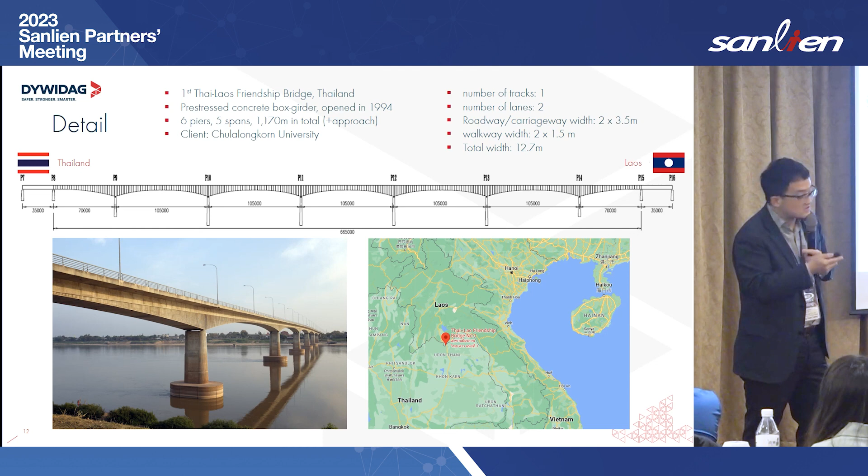In this project, we cooperate with Chulalongkorn University in Thailand. These are the details—I'll leave it to you.

These are our project sensor outline. We installed 19 strain gauges, accelerometers, temperature sensors, deflection and settlement gauges, displacement gauges and inclinometers, and CCTVs on that.

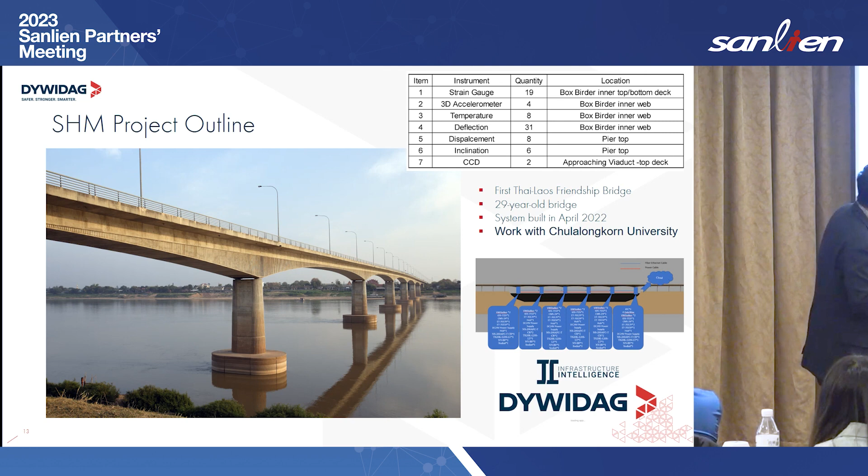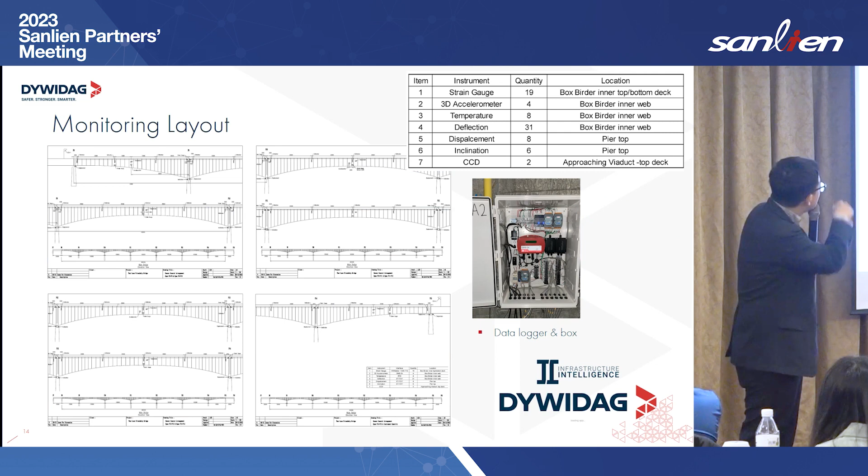These are the drawings and the actual data logger box on site. This is actually from Sanlien—they built this system for us.

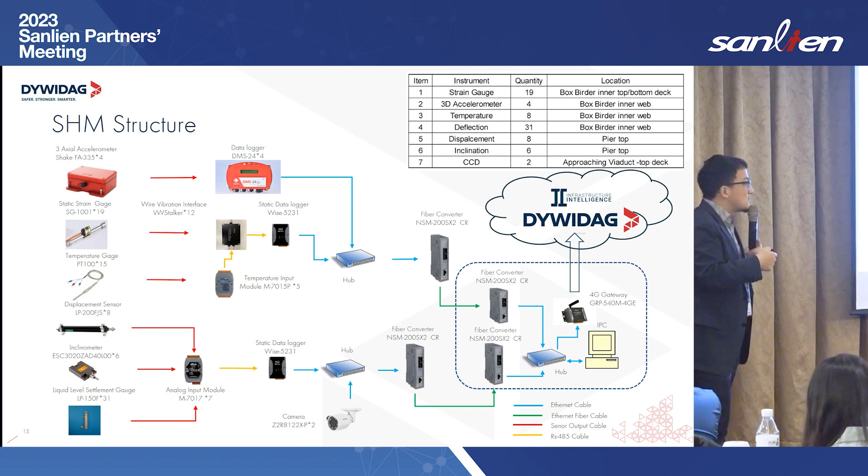This is our SHM structure, from sensors, data loggers, and some hubs, and they will process the data and send it to our II cloud platform.

When it comes to our II platform, I will introduce this. We can have access to this system with any computer, iPhone, or iPad—anything connected to the internet. This is actually the interface of the first Thai-Lao Friendship Bridge. You can see the sensor map here, and all the pages and these icons.

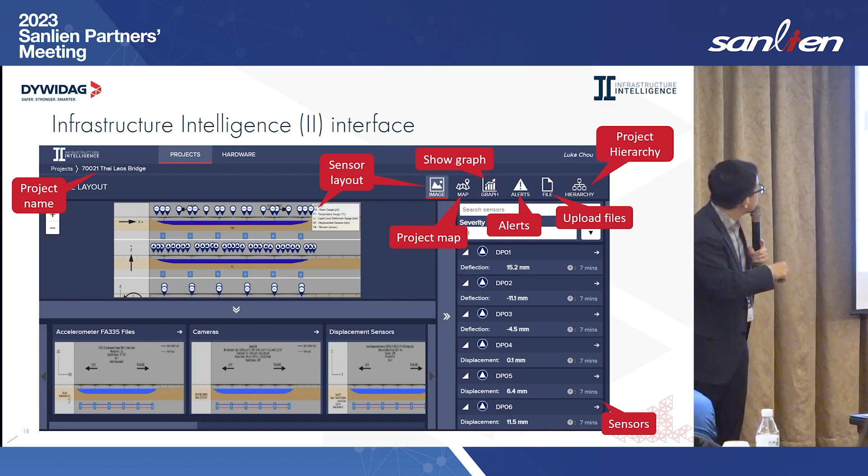The others, and this is the sensor map.

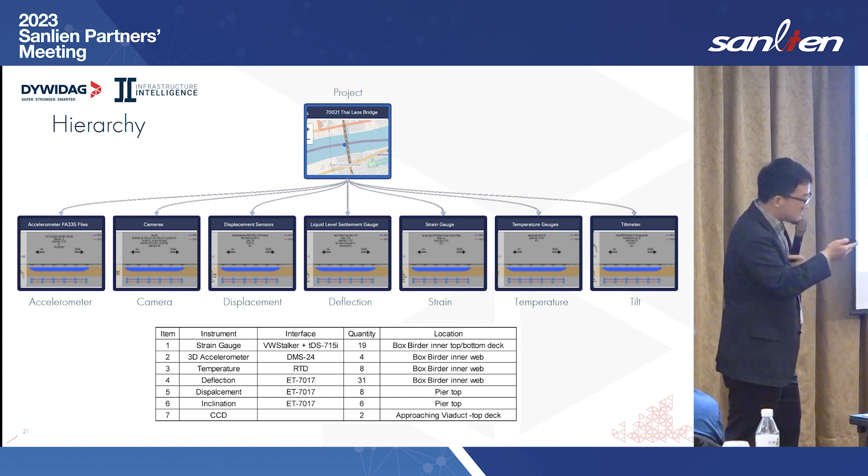In this project, we have a comparatively simple hierarchy with only one level and only sensor basis. So there are only seven pages under that.

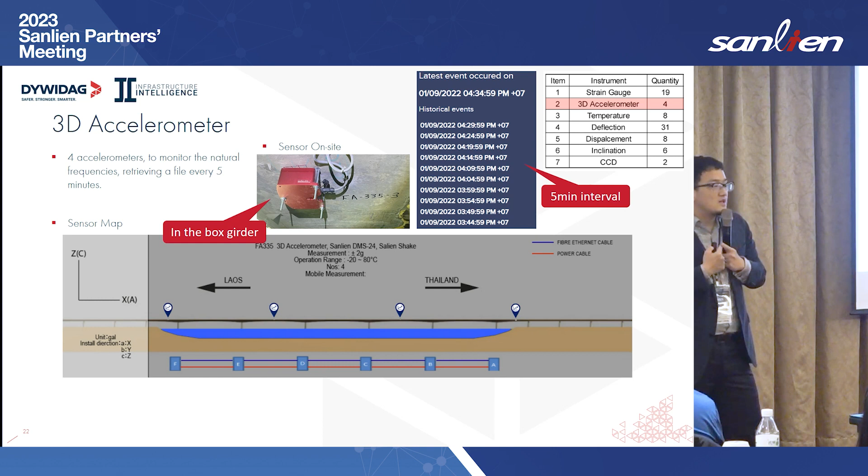The first comes from 3D accelerometers. There are 4 accelerometers installed on this bridge, representative of the span, and we monitor the natural frequencies of the box girders. If the natural frequency changes, we will know something has changed, and further inspection or repair should be applied.

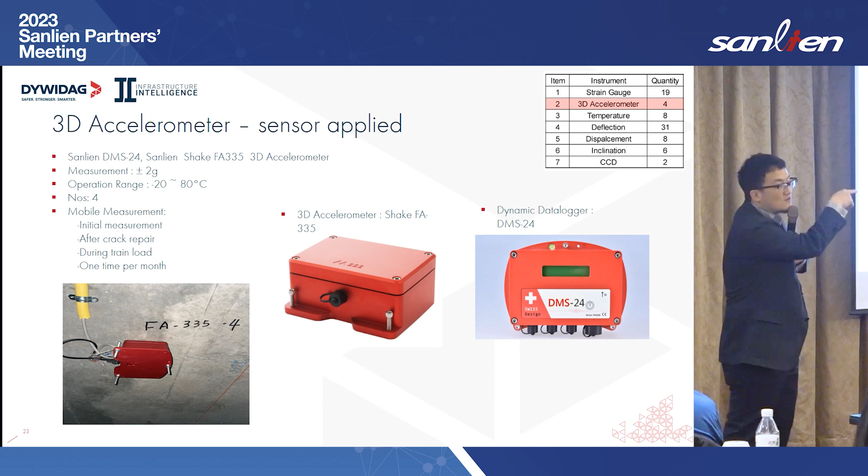These are the FA335 sensors we apply, from Sanlien. You can see that over there as well. And this is the photo we actually shot from the site.

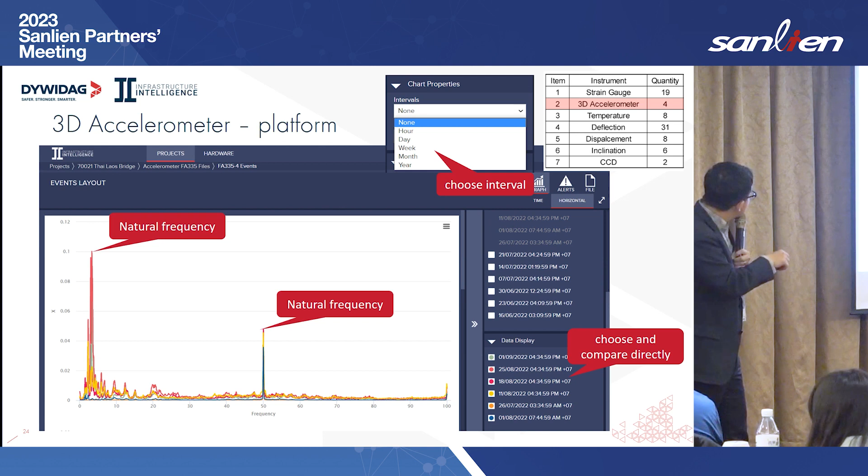This is the data on our platform. We can see this data with a 6 week interval, and we can see the natural frequency. The peak here, this is mode 1, mode 2. The peak is not moving significantly, so we can say the natural frequency is not changing a lot. Maybe the condition of the box girder is not changing, so this is a good sign for us.

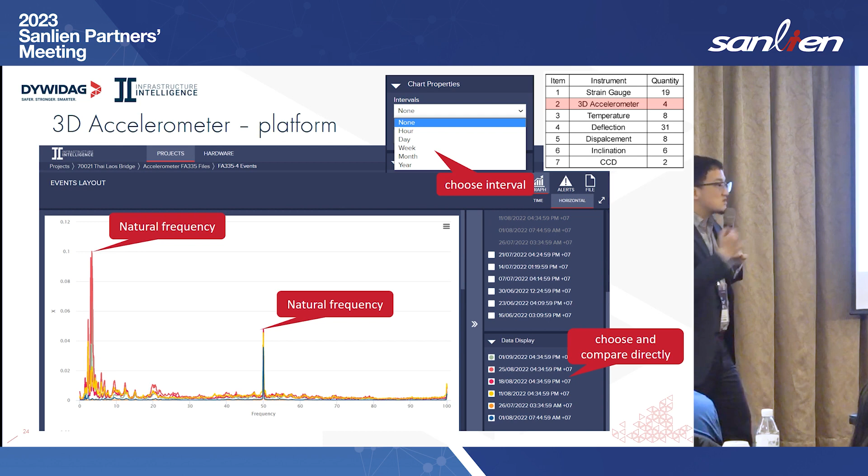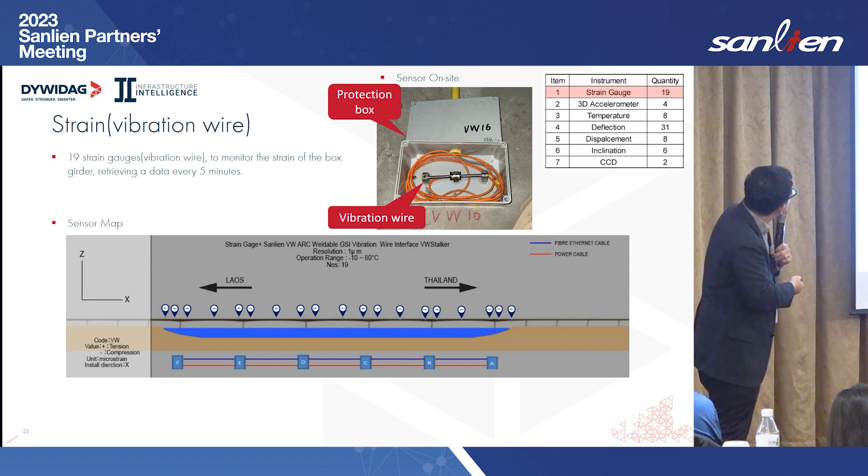For the strain gauge, we use the vibration wire strain sensor. You could also find that sensor over there. We applied 19 sensors, distributed on the bridges. The sensor is SG1001, and we get the data back every 5 minutes.

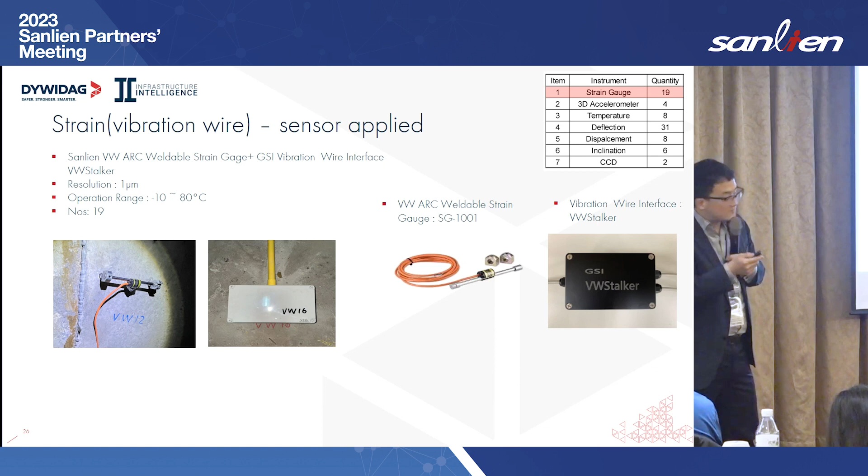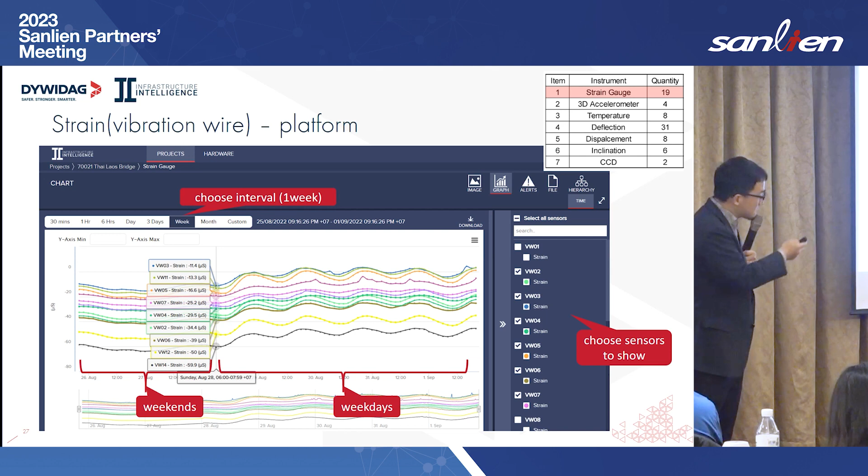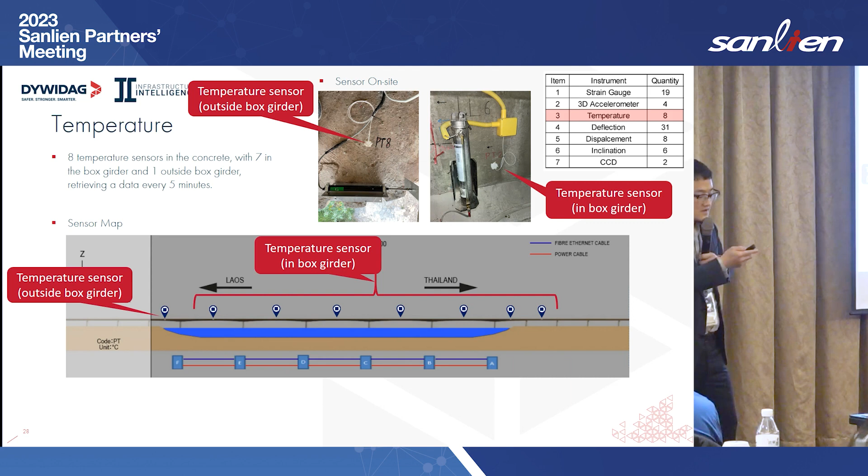For the temperature gauge, we applied one on the outside of the box girder and 7 inside the box girder. Outside the box girder, you can see here. This one we applied in the pier. The temperature sensor we use is PT100, and we have 8 of them.

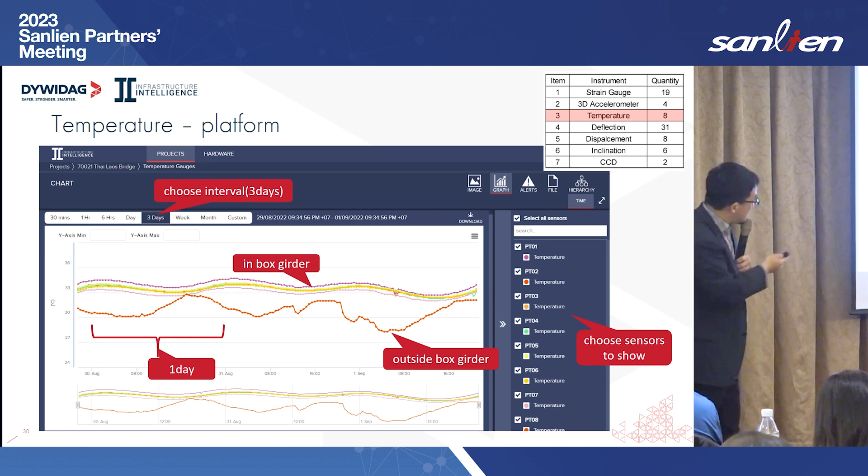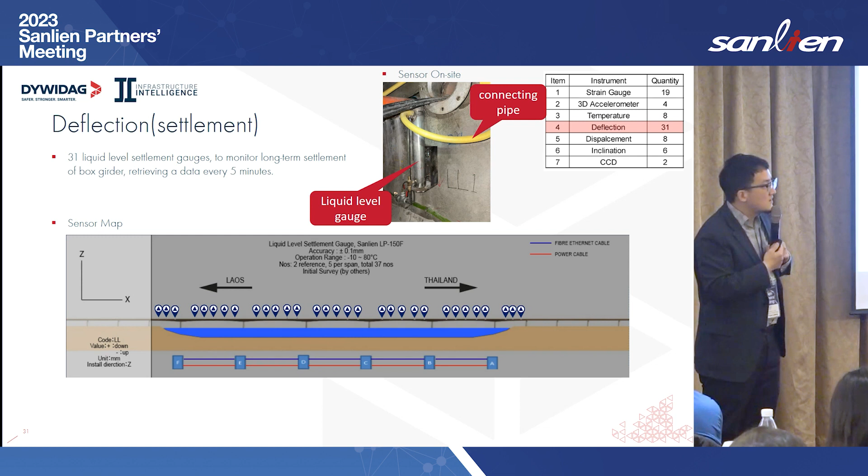This is the deflection gauge, also called the settlement gauge. We want to see the condition of the foundation, and check if settlement occurs. We have a set consisting of 31 deflection gauges, which we call liquid level settlement gauges. It's a sensor like this, the LP150.

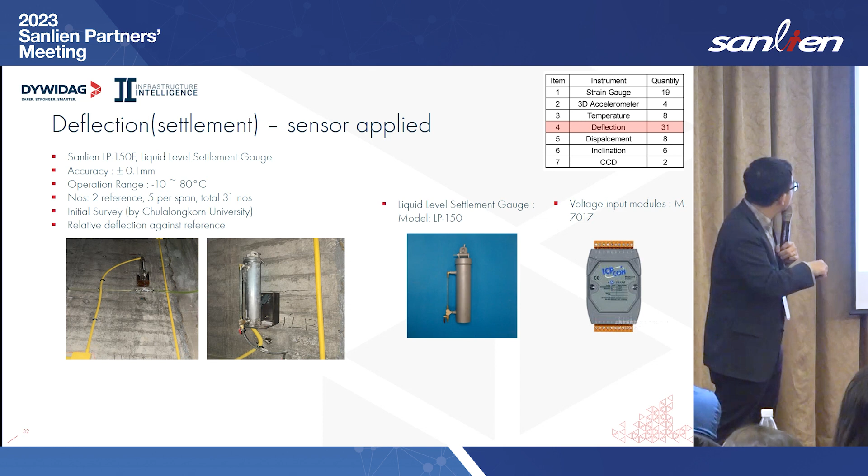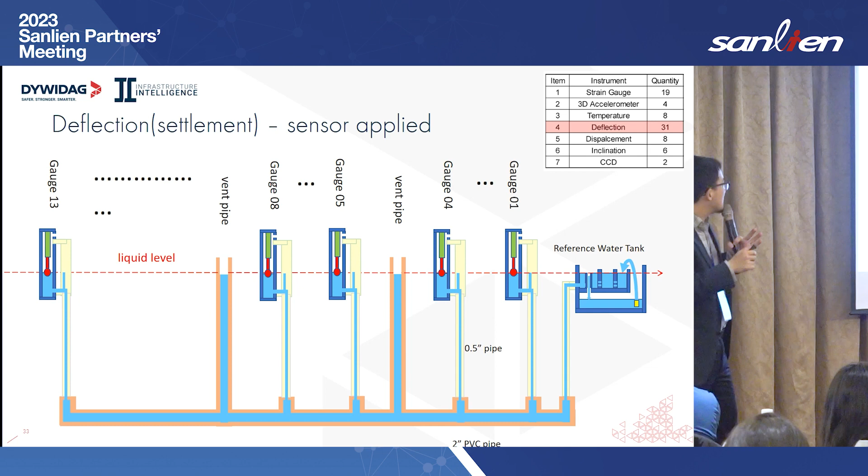This is a little diagram of how it works. It has a water tank, and all these 31 liquid level gauges are connected together, so we can see the relative settlement within the gauges.

And this is what we saw, this is in a month. Now we can see this data is up and down within 4 millimeters. This is not a very big value for us, which is also a good sign for us.

And since this is not a short-term indicator, we would have to observe it over longer intervals.

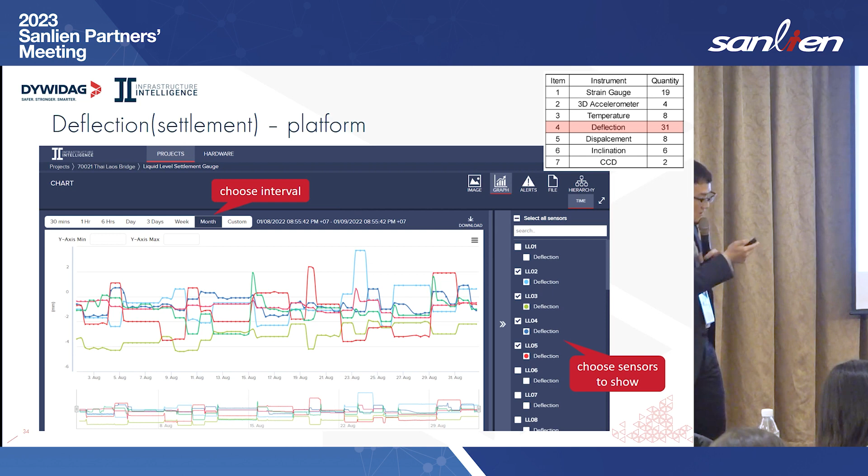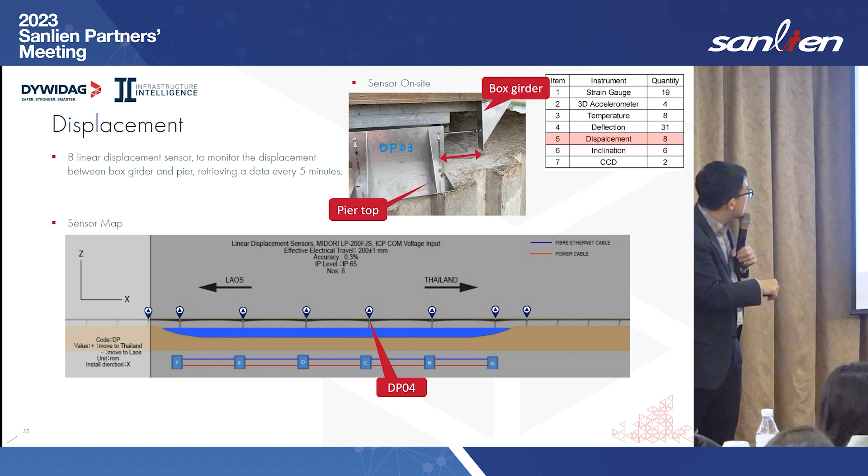This one is the fixed one. The other between the pier and the box girder has sliding devices between them, and this one is kind of a monolithic one, so we will see no displacement over here.

As you can find here, the blue straight line belongs to the fixed ones, and from the left hand side they go to the negative side, while the other goes the other way. You could also see very clear patterns within a day, repeating again and again, mainly from the temperature.

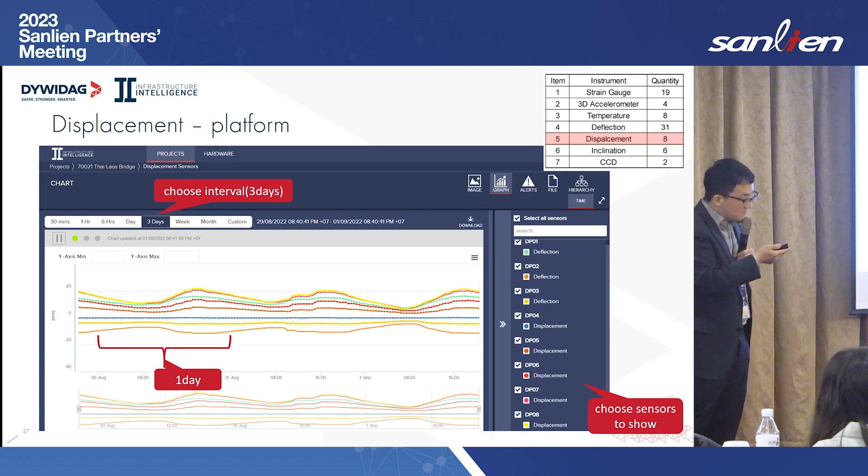If we put temperature in, we can find that when the temperature goes hotter and colder with bigger waves, the displacement sensor will see this same trend.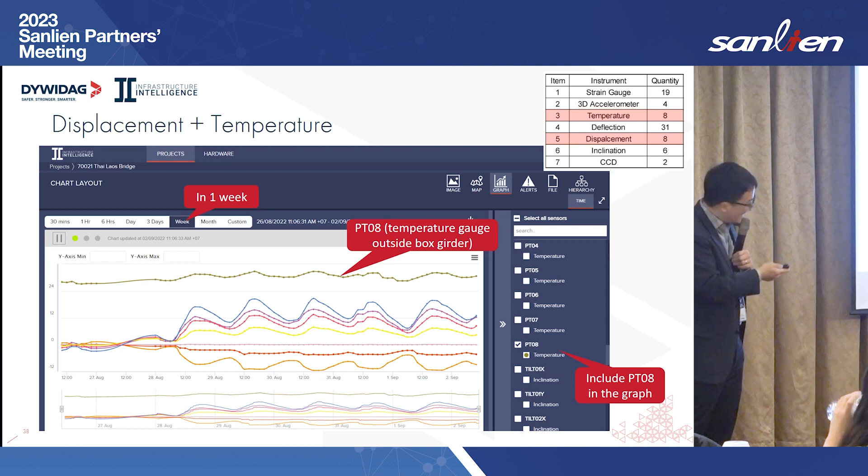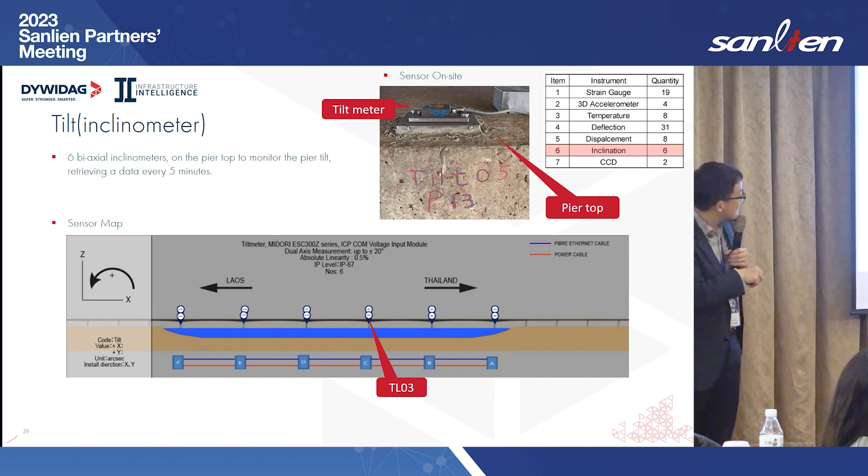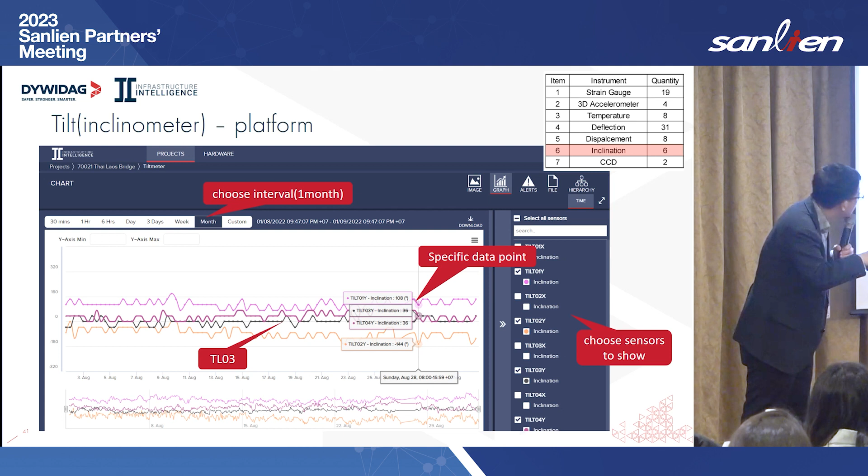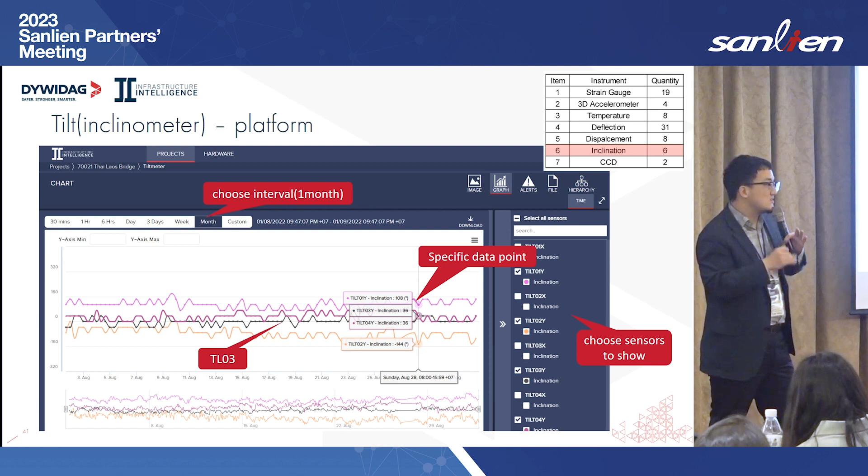When it comes to tilt meters, we apply 6 tilt meters on every pier, including tilt 03 on the fixed pier. We'll see something interesting later. We apply the Midori inclinometer on the pier, installed by Sanlien. We can see the inclinometer data here in deep green, tilt 03, which shows comparatively minor tilt. We think this is because that pier is the fixed one with more stiffness than the others.

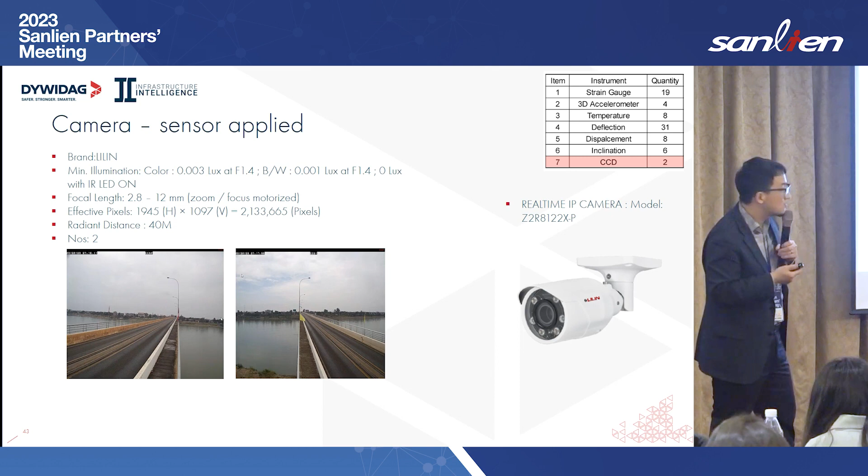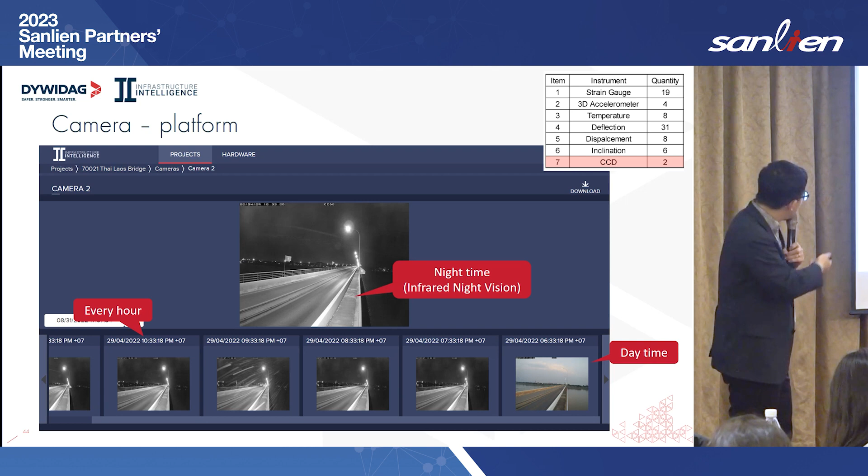We have also applied two cameras at the end of the bridge, with a live stream camera, and we also retrieve a photo per hour. This is the photos recorded on our system, and I'd like to share some interesting ones. We can see rain, sunset, and things like that, and also a train passing by.

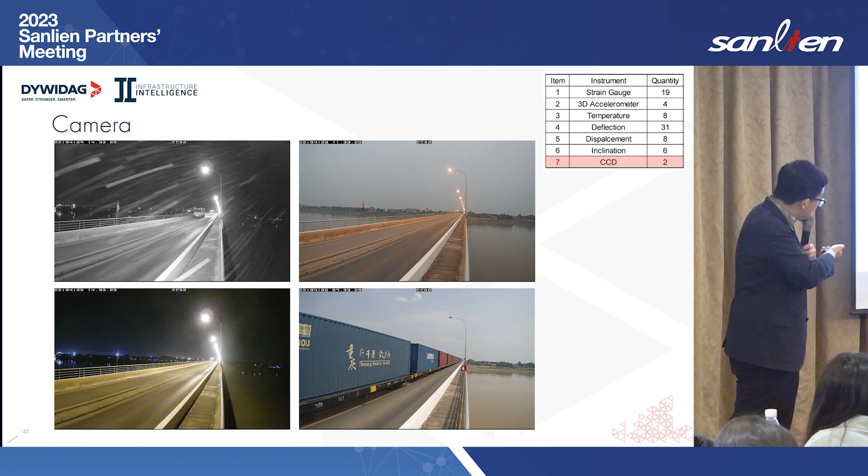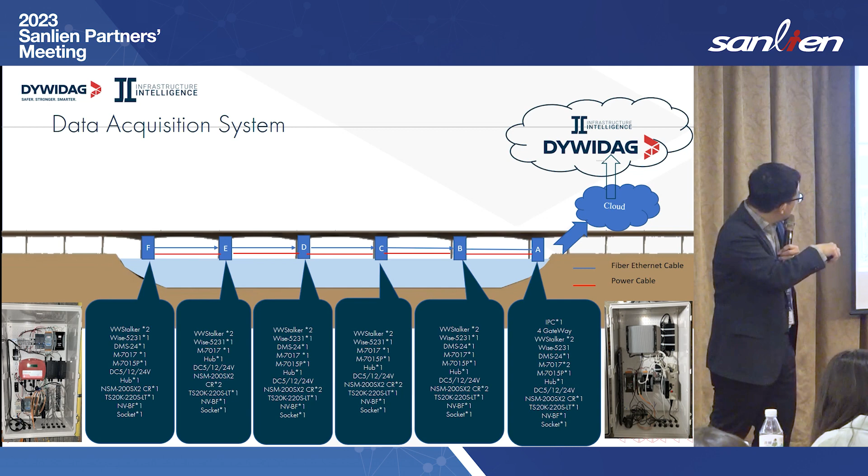This is the data acquisition system from Sanlien. These are the actual data boxes they provide to us.

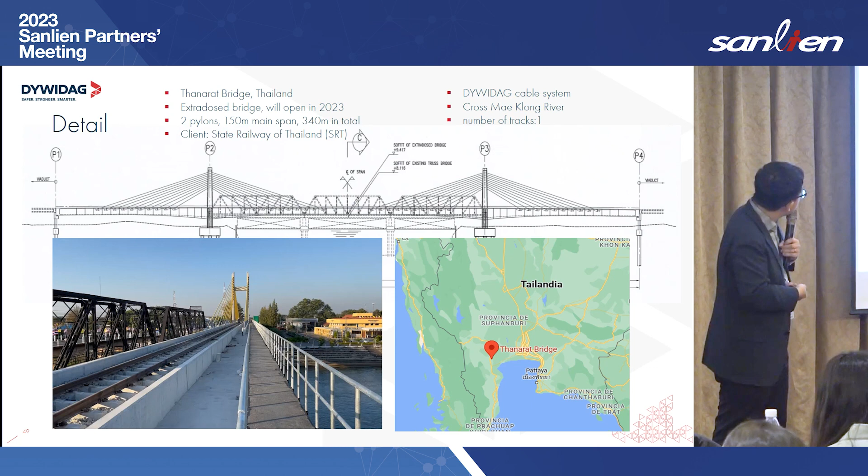Now we're going to the Mae Klong extradosed bridge, also called the Thanarat bridge. As you can see, this is the third bridge, lying parallel here. The bridge we're talking about is the yellow one. It's an extradosed bridge with 2 pylons, about 150 meters in main span and 340 meters in total. The yellow cable here is also provided by us.

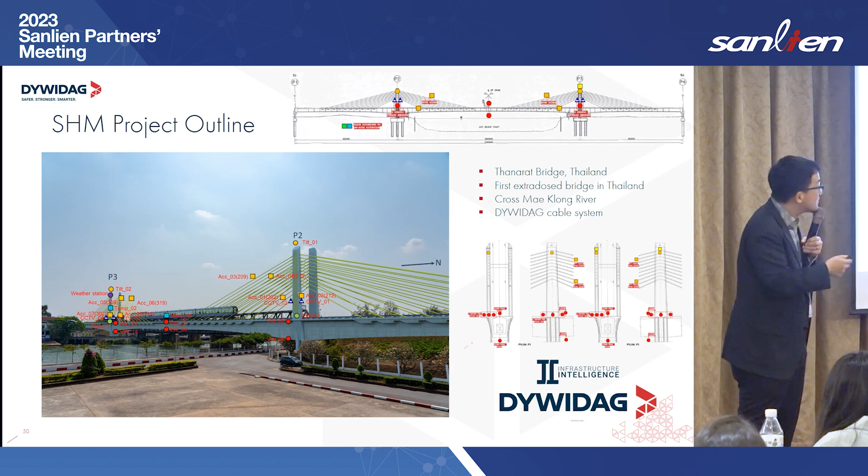This is our sensor layout. You can see the sensors we applied here: accelerometers, tilt meters, and so on. I'll introduce these to you later in these pages.

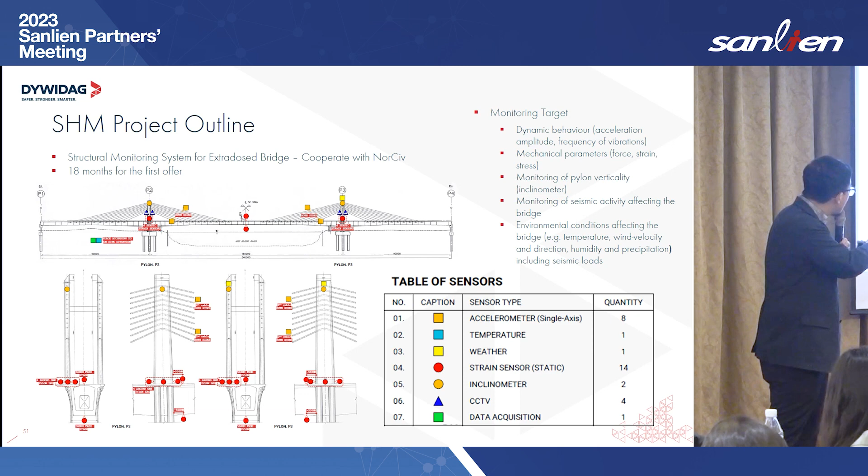We applied 8 accelerometers for cable force monitoring, 1 temperature sensor, and a weather station including wind speed, wind direction, rain gauge, temperature, and relative humidity. Also 2 inclinometers on the pylon top, and 4 CCTV cameras to see the whole deck.

This is the drawing and the actual photo from the site. This is our SHM structure from Sanlien as well, quite similar to the first bridge, with sensors, data loggers, and so on.

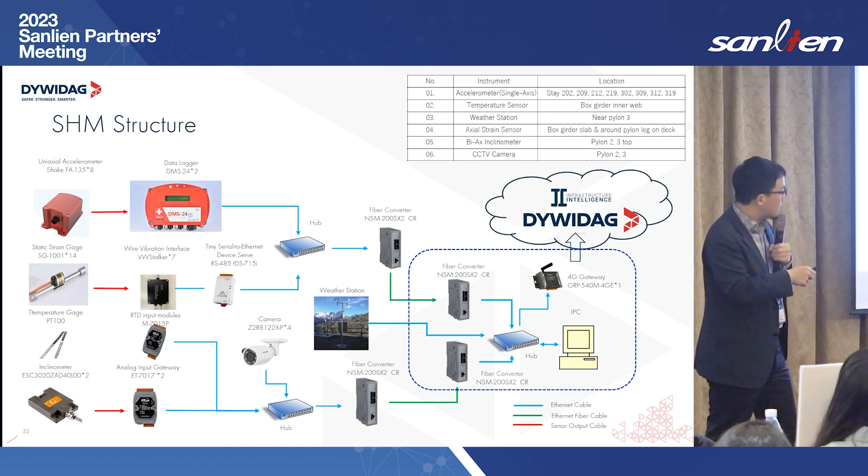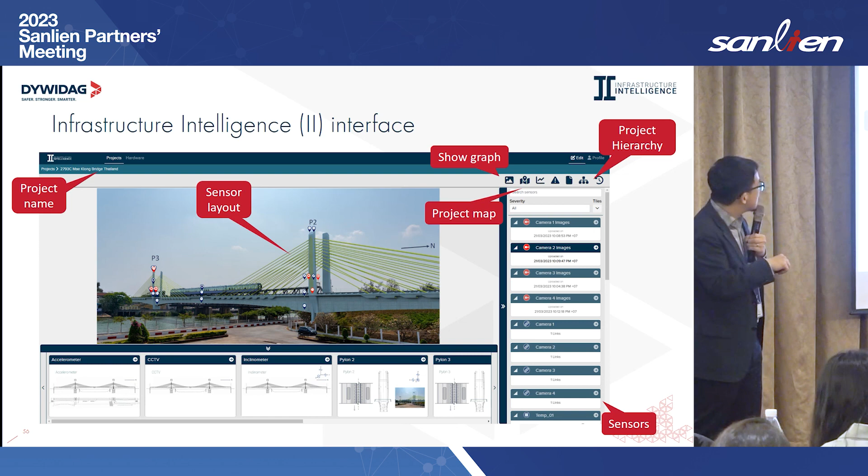The sensor will somehow process the data and send it to our II platform. Let me jump over to show you. This is our actual view of the II platform. We can see the bridges here and the sensors we applied. With a click, we could see the sensor data and the graph on the map.

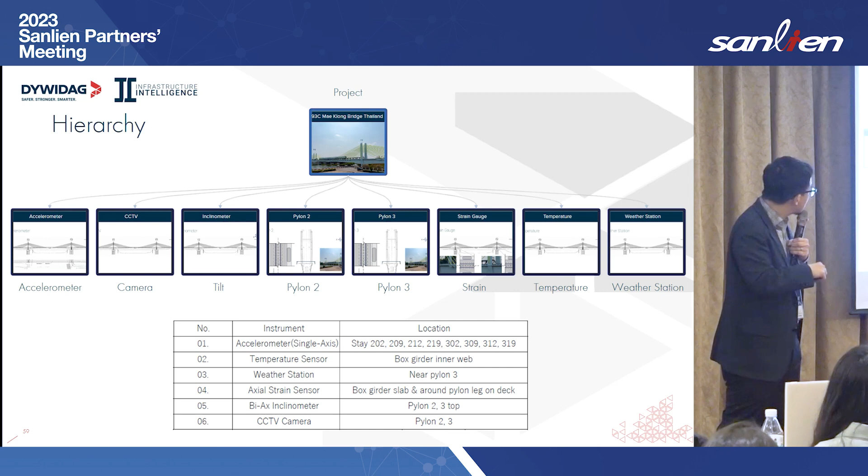The hierarchy of this is more complicated. We also have a 2-pylon view, with a pylon section to see the sensors on the pylon.

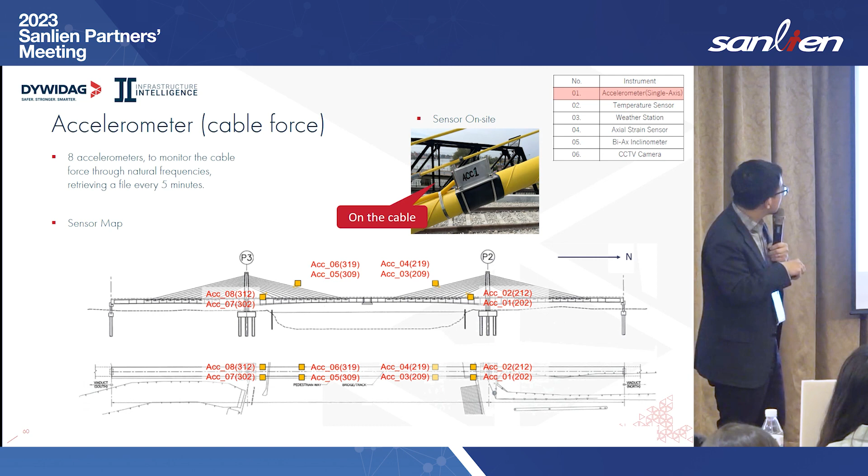First, accelerometers for cable force — these are the actual photos. We applied 8 accelerometers to monitor the cable force, and the sensor retrieves the data every 5 minutes. We applied the FA135.

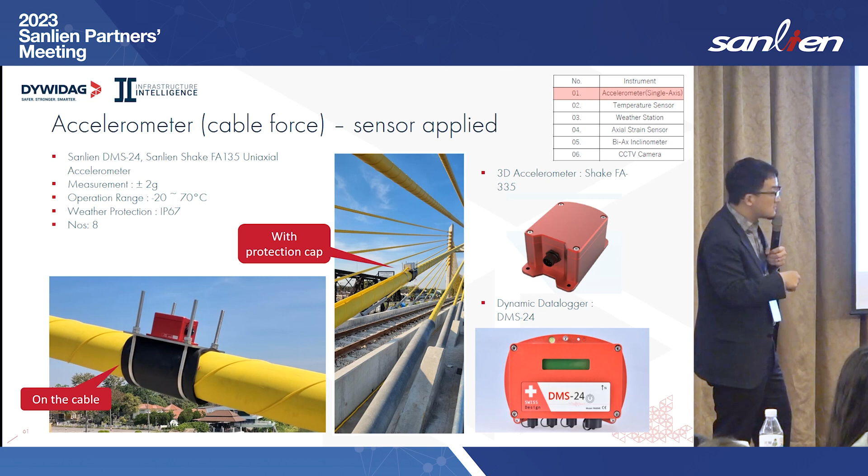This is a typo here — it's 135, with the data logger DMS24. This is a photo just installed on the cable. We use a fixture to fix it on the cable to see the cable vibration. This is the method statement of how we transfer the accelerometer acceleration to the cable force. We transfer the acceleration through FFT or PSD, power spectral density, to fetch the natural frequency of the cable, and then through a simple algorithm, we get the cable force.

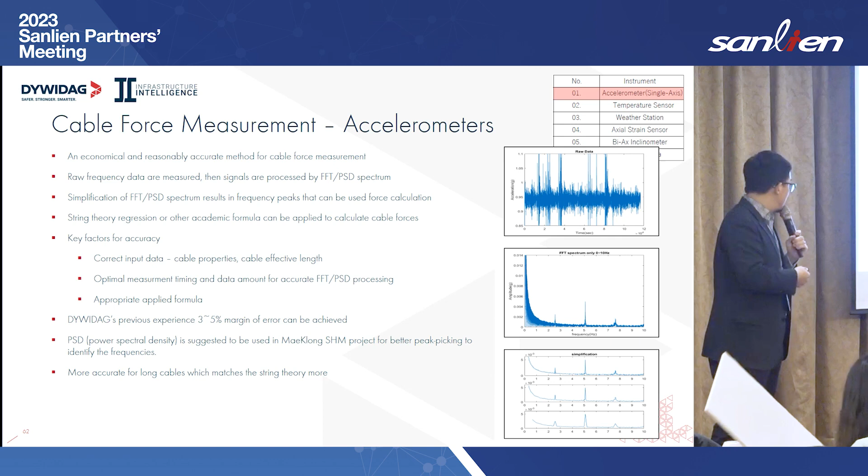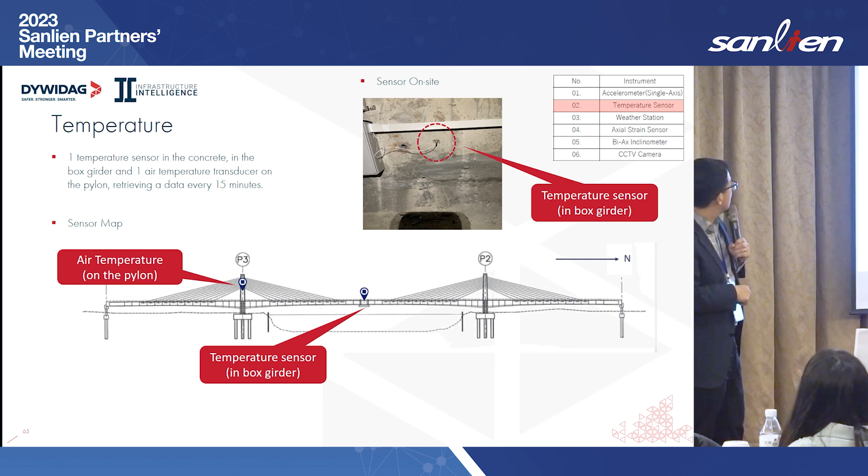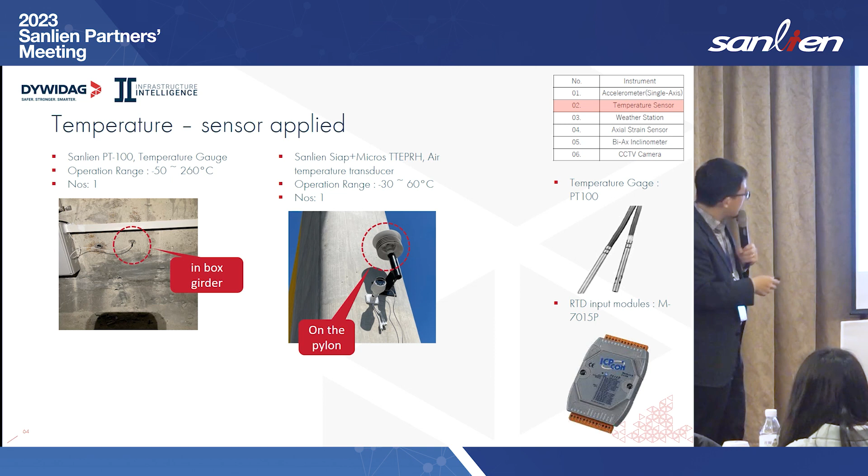For temperature gauges, we apply 2 temperature gauges: one in the box girder, and another integrated in the weather station. We drill a hole and put the temperature gauge in, and another one is here. As you can see, the air temperature outside has a very big wave, while the sensor inside the box is delayed and smoother.

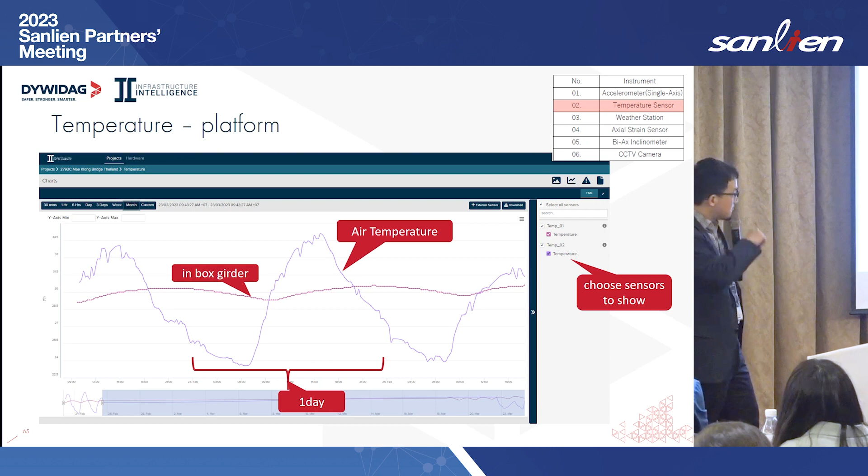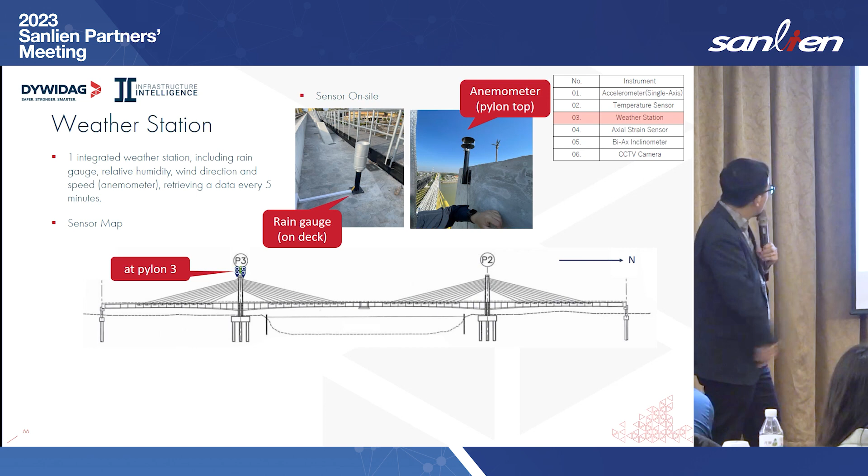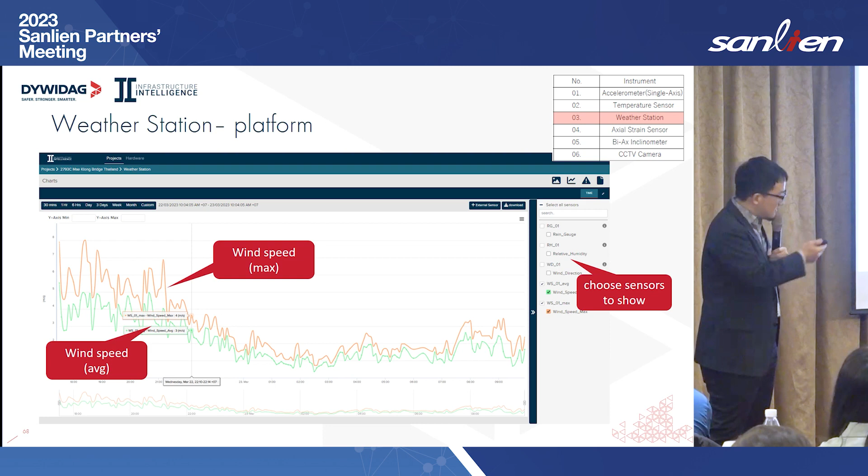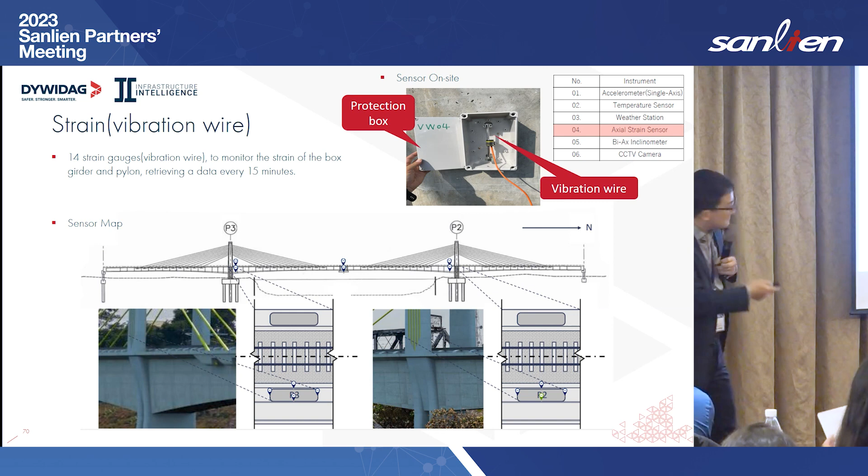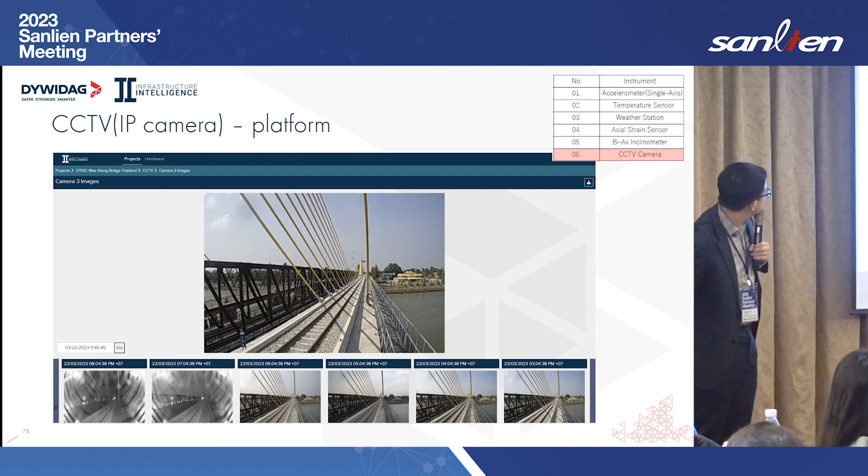Now here comes the strain gauge vibration wire. Time's up, so let me go very quickly through CCTVs, inclinometers, and CCTV photos. Thank you.